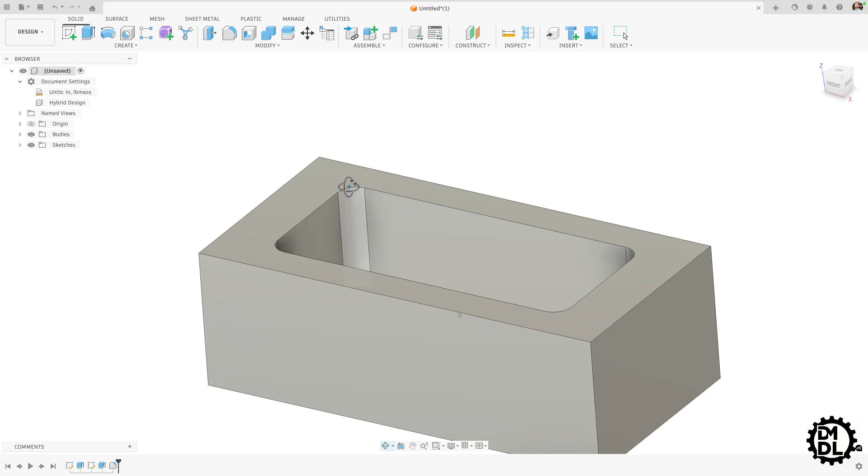Tip number 1 is that you want to slightly oversize the radius of your internal fillets or your internal corners. So the reason for this is your cutter, what you will be using to actually mill this pocket out, has a fixed radius or a fixed diameter.

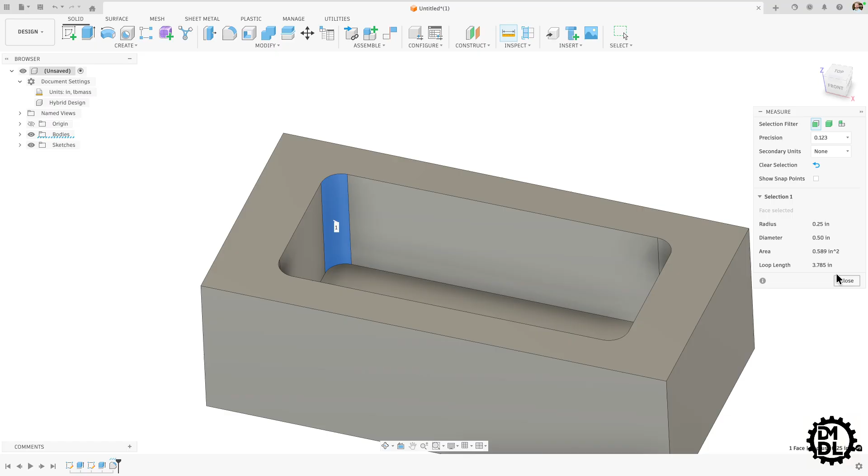And in this case, our pocket is 1.5 inches deep, and I have it modeled with a 0.25 inch radius. That means you could cut this pocket out with a cutter that is 1/2 inch in diameter or a 1/4 inch radius. But if you did that and you look at this from the top, the radius will exactly match your cutter.

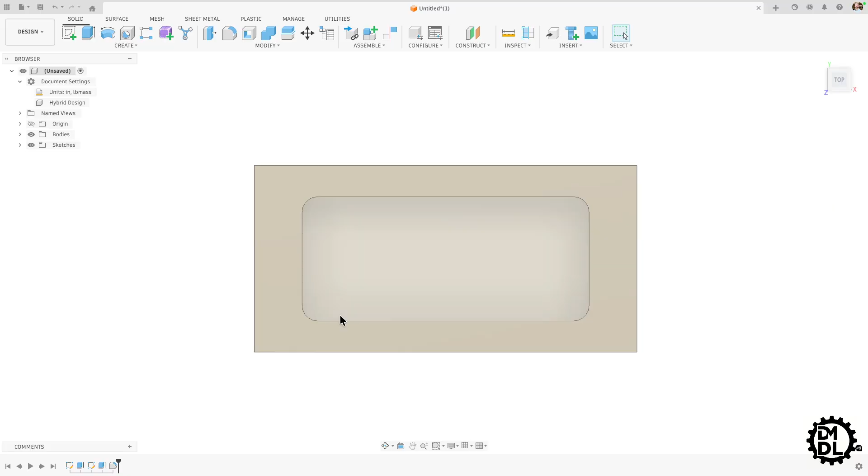So as your cutter comes along, it's going to get to the corner, it's going to have to stop and make a right angle and come down to keep cutting. And it's going to have to do that at each corner. Now, why is that a problem? You might think, well, that's fine. Our fillet is a 1/4 inch. The radius of our tool is a 1/4 inch, no problem. Well, there's a few issues with that.

When your tool comes over and stops and has to change directions at 90 degrees, you're going to engage more material at that moment you come into this corner. It may slightly oversize your fillet or the radius in this corner, so you might be out of tolerance, and your surface finish will not be quite as nice as the tool is engaging with more material at once. So those can cause problems. Those can cause quality issues.

So what you want to do is actually slightly oversize this radius based on what tool size you think will actually be used to cut this out. So let's talk a little bit more about the tool. If we go over to McMaster, here's a tool that could be used to cut this out. You can see it has a 1/2 inch diameter, so a 1/4 inch radius. And this is something that would work pretty well.

It has a cutting depth or a length of cut of 1.5 inches. You can see that here. So this tool is something that could work. But you might notice that it also has a radius on the bottom of it. And that is something that I can show you here in a minute, the impact that will have and why you may want that. Other ones you get can just have a square end, and they'd just be a square end mill. This one has a rounded edge, which is just dependent on what you want your pocket to look like.

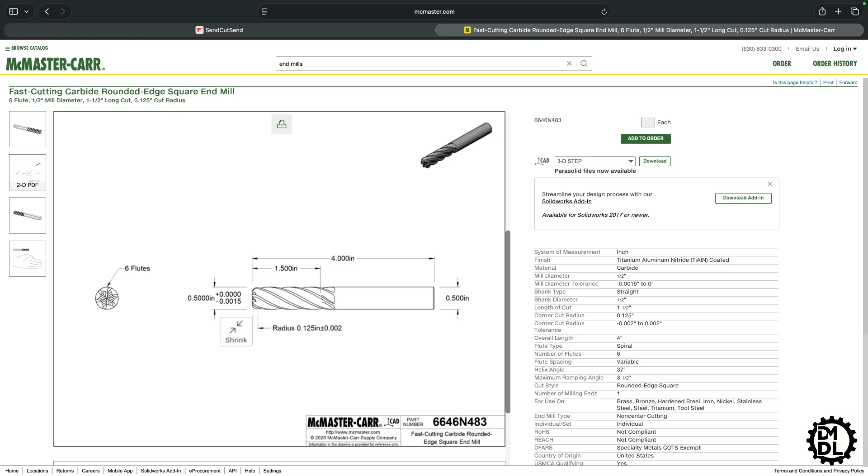But here, you see the diameter is 1/2 inch exactly, plus 0 minus 1.5 thou. So essentially exactly a 1/2 inch. So we want to oversize this a little bit so we don't have this issue of the tool coming and stopping in the corner and then turning 90 degrees. You want it to be a nice, smooth cut. So to do that, let's oversize this.

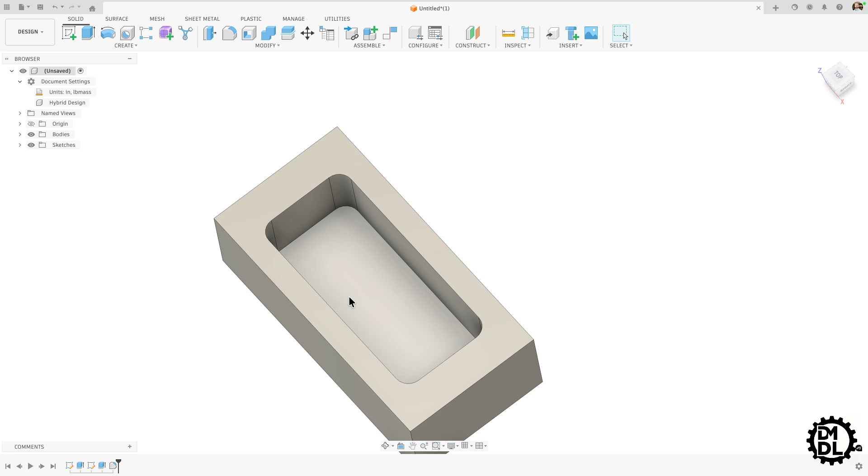So we'll go back into our fillet, and instead of a 1/4 inch, let's bump that up to 0.3 inches. And so now, since it's oversized, the cutter can essentially follow the path of this wall or this edge without having to stop and make a 90-degree turn.

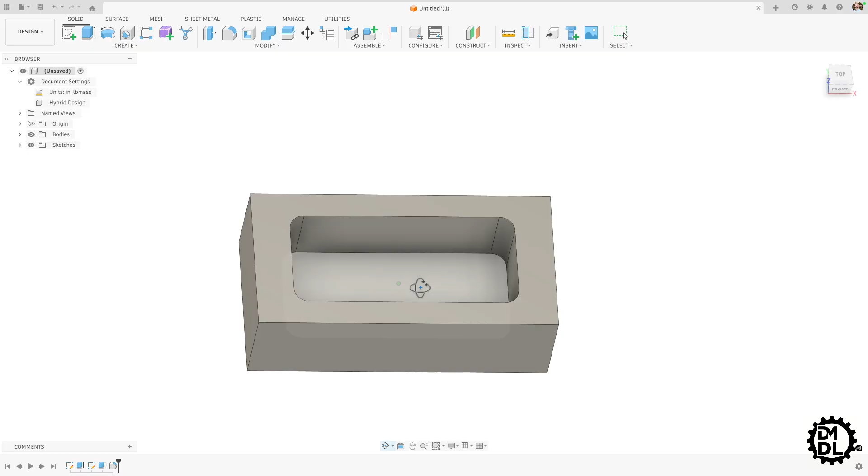One reason why it may make your machinist happier is if you model this at exactly a 1/4 inch, they would probably know this issue and they would automatically default to a smaller cutter so that they didn't exactly match the radius of the fillet with the radius of the cutter.

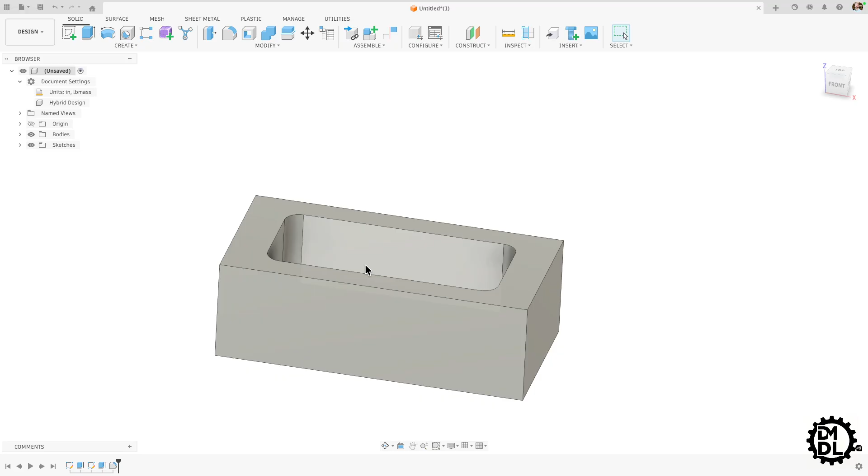And the downside of this is if they use a smaller cutter, it's just going to take longer to actually mill out this pocket, and they will pass that cost on to you, the designer, or the company that is ordering these parts. So that's not ideal, especially if you are trying to maximize or optimize the cost of your part.

So again, just to review that, you want to slightly oversize the radius for your internal corners. And that is oversized based on the radius of the cutter that you believe will be used to actually mill out your part.

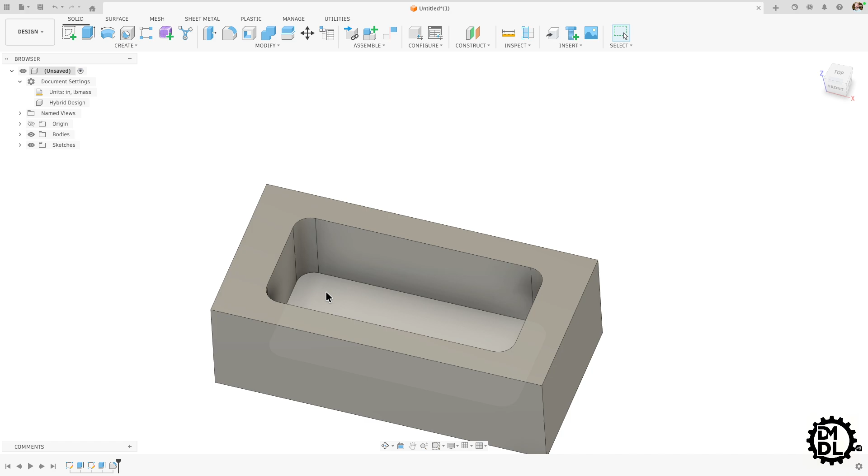Now, the next tip is looking at the ratio between the radius or the diameter of the tool that will be used to mill out this pocket and the depth of your pocket. And now let's try to think about why that matters. So you're looking at this depth here, and then you're also looking at the radius here. So if we reduce this radius, just as an example, let's say we reduce it from 0.3 to 0.13.

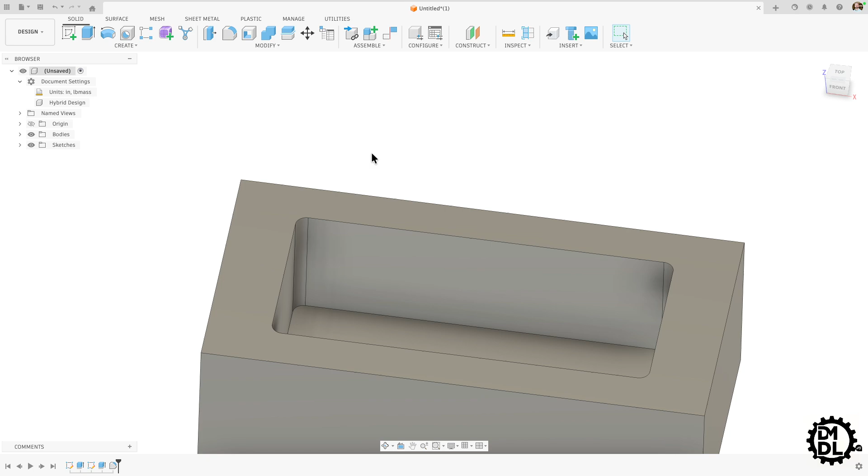Now you're going to have to use a much smaller cutter to mill out this pocket. If it's 0.13, you're going to have to use something that is probably a 1/4 inch end mill because the diameter is 0.25. This radius is 0.13, so a diameter of 0.26 if you double that. And that will require you to have a much longer end mill to make this cut. Now, why does this matter?

Well, again, let's go over to the camera real quick, and I will show you just a quick example of why this may matter. So if you think about it, if you have a larger cutter, you can hold it a little bit closer to where it's actually going to be cutting. Let's say this is your material and this is your end mill. So it's going to come and cut, and you'll have a nice stiff tool, and you're going to get a nice surface finish on the surfaces that you're cutting.

However, if you have a smaller internal radius, then you're going to have a longer tool, and it's going to be held more kind of like this. Just imagine this is a smaller diameter cutter that you'll be using to mill that out. And as you come in to cut your edge, you can see this thing is just not going to be as stiff. So you're going to get some deflection, you're going to get some chatter as it goes along and cuts the edge of that part.

And so you're going to have a worse surface finish, potentially not hit your tolerances, and it's going to be a more difficult part for the machinist to make, and they are going to charge you more for that. So, what is the tip? How should you design this? Well, a good rule of thumb is going for a ratio of 3:1. And this is a ratio of the depth of your cut to the diameter of your cutter, or the cutter that you think will be used to mill out your pocket.

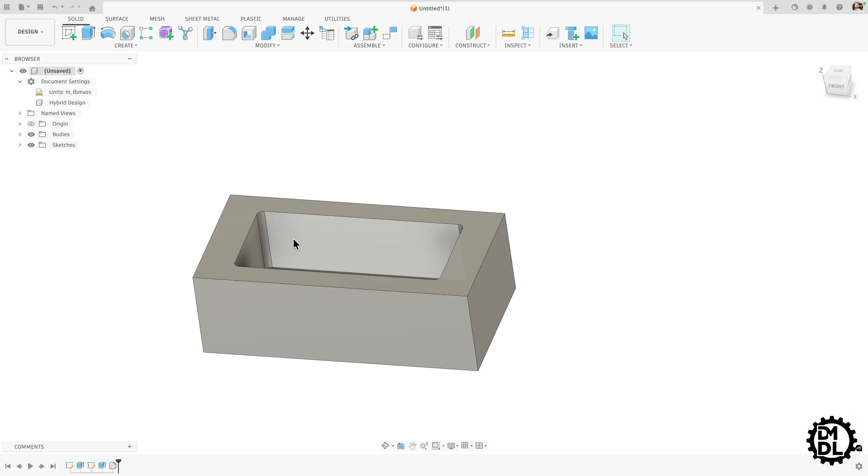So, in this case, let's see, the depth of it here is, well, let's pull up our measurement tool. Okay, depth, as I said, is 1.5 inches. So we want a 3:1 ratio. So 1.5 divided by 3, you probably already did it in your head, that's a 1/2 inch. So that means the diameter of our tool or our cutter should be a 1/2 inch. Okay, so what does that mean for the radius?

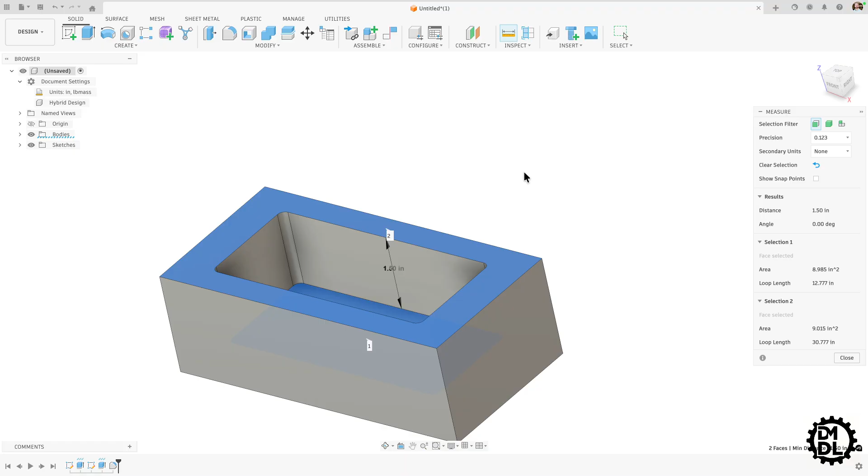Well, that means we should go back to where it was. And let's make sure to close that. Let's go back to 0.25, or as we discussed, something that's slightly oversized. So we'll go to 0.3. This way, you know that you're going to have a nice stiff tool as it's going through and making this cut and milling out this pocket. You're going to have a better chance of hitting your tolerances, and you'll also have a better surface finish on these internal surfaces.

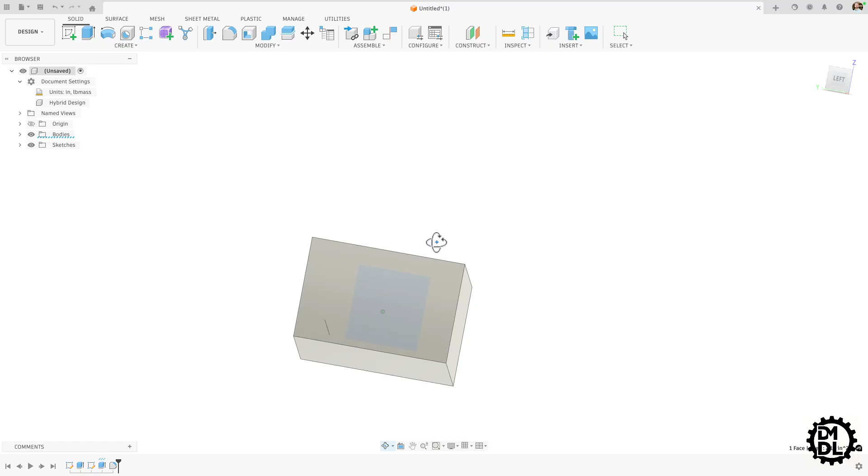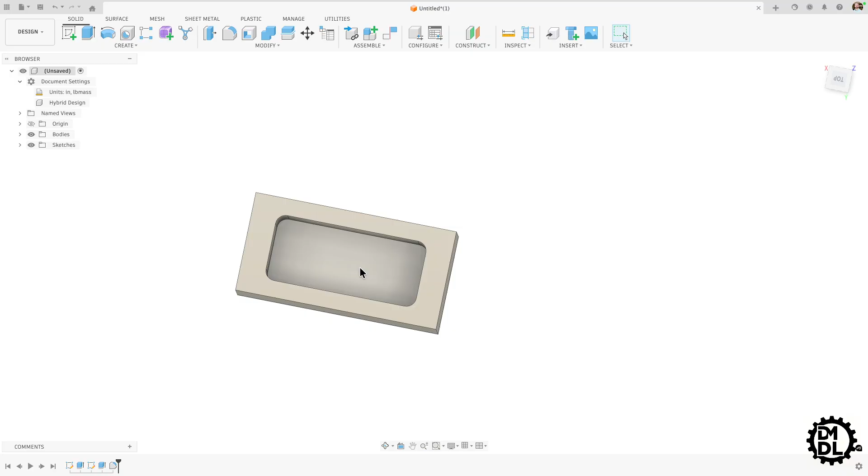Additionally, the cost will be reflected as lower if you do this, and there's a few reasons for that. The first one is, again, if you have a larger cutter, you're just going to be able to cut out this pocket faster. And that's just kind of common sense. If you are using a larger shovel, you can dig a hole a lot faster than if you're digging with a tiny shovel, right? And it's kind of similar here. If you're using a larger tool, you're going to be able to remove more material faster.

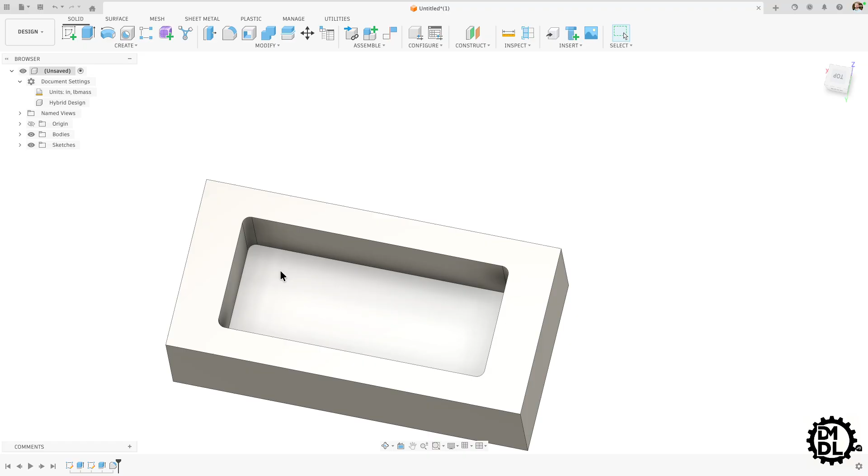But if you reduce your internal fillet here, let's go back to that 0.13. Now you have to use a much smaller tool to mill this out, or you have to use two different tools. You could use a larger one to mill out most of it, and then use a smaller tool to finish it and get these 0.13-inch radius corners or fillets on your internal corners. And so then you have an extra tool change, and that is also going to add some cost to your part.

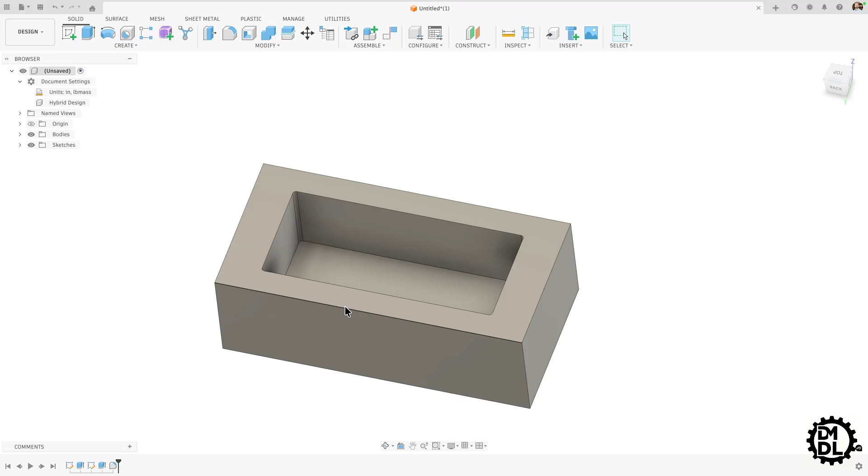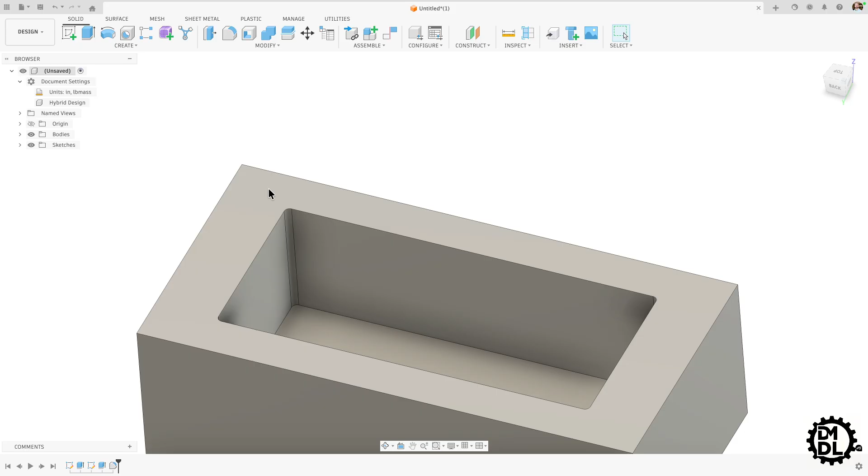And then you can imagine if you make this even smaller, let's say we go 0.063, now this is just a plain difficult part to manufacture, because you're going to have to use a cutter that is very thin, has a very small diameter, and it's going to have to cut a very long distance, 1.5 inches down. So that is going to wobble, that is going to chatter, it's going to mess up your surface finish. And that's if you can even source a tool that has that diameter as well as that length of cut. And again, going back to McMaster-Carr, you can search for that if you want.

If you're designing a part and you want to see, is this even manufacturable? Let's go away from the 1/2 inch milling diameter. And in this case, we were talking about a 1/16 inch. Okay. We don't necessarily need the rounded edge at the bottom of this tool. Let's get rid of that. And we want to look at the length of cut. So here, at least on McMaster, the longest length of cut you can get on something that is a 1/16 inch diameter is only 1 inch.

And let's just look at that. And this is also tapered. So again, this is just a way to see that this is probably going to be a difficult part. Not to say that it's impossible, but you're definitely not making it easy on your machinist, and you are going to see that reflected in the cost. So that's a helpful tool there. It's not one of the 3 primary tips, but make sure that there are available tools to even be able to manufacture the part.

So you want to make sure you stick to that 3-to-1 ratio. And again, that's the ratio between the diameter of the cutting tool to the depth of your pocket. You might be able to get away with a 6-to-1 ratio. You can get away with higher, 9-to-1, 10-to-1, but you will start to see some cost impacts on that.

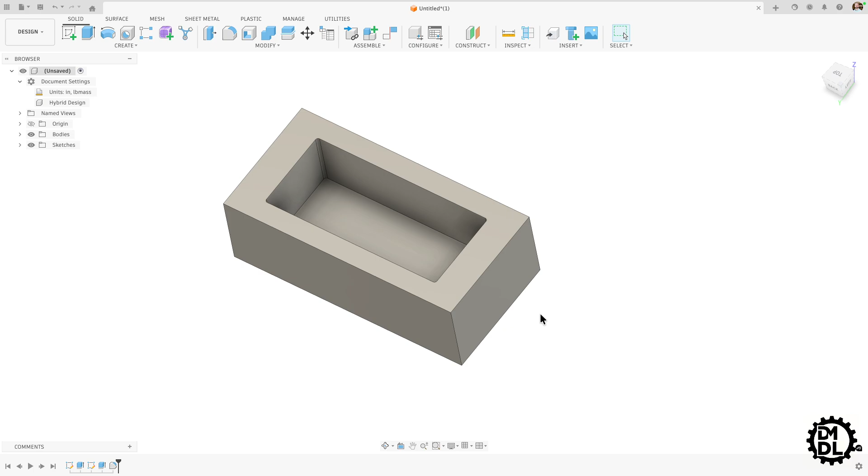And I did a quick little test of this just to see what an online shop would quote. And of course, I went with SendCutSend because they're awesome. And I did a few tests with this. And let's just see what the price difference is. So here's a square piece with a 1.5 inch cut in it as well, with some different radii, with a 3-to-1 ratio, 6-to-1 ratio, and a 10-to-1 ratio.

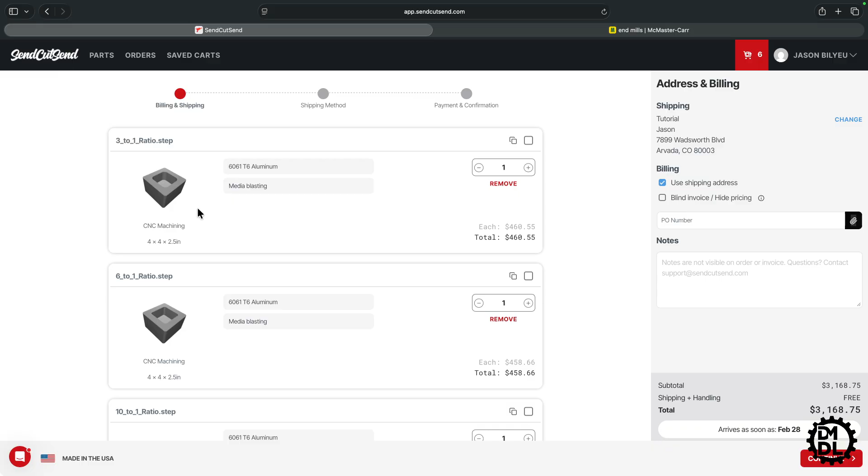You can see in this case, the pricing actually doesn't really change that much. And I think the reason for that is it's a smaller part. The time in the machine to actually mill out this pocket doesn't really change much from using a larger end mill up here to a smaller end mill when you have that 10-to-1 ratio.

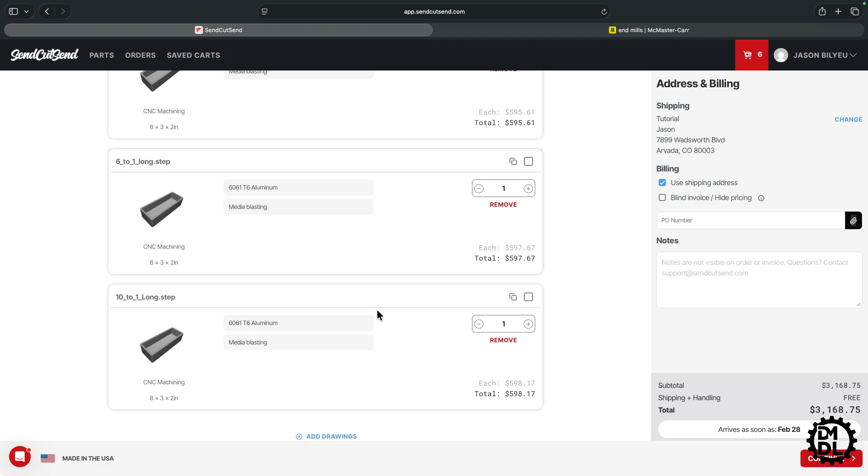However, as you get to larger parts where there's a lot more material to remove, you start to see more of a difference. So if you use the 3-to-1 ratio, you can see this part is $595. If you go to 6-to-1, it goes up to $597. 10-to-1, it goes to $598. Again, in this case, these prices are all very similar, but you can see the trend. As they're having to use a smaller cutter, it's going to take longer to remove all of that material, or they have to do a tool change, which also adds cost.

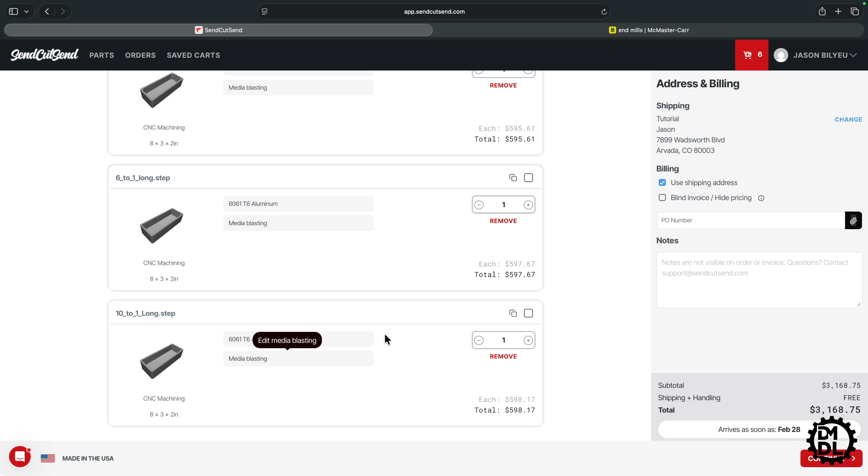So that's just a quick example of why this ratio is pretty important and matters, especially if you are manufacturing a bunch of these parts, and even just a small cost difference starts to add up over time.

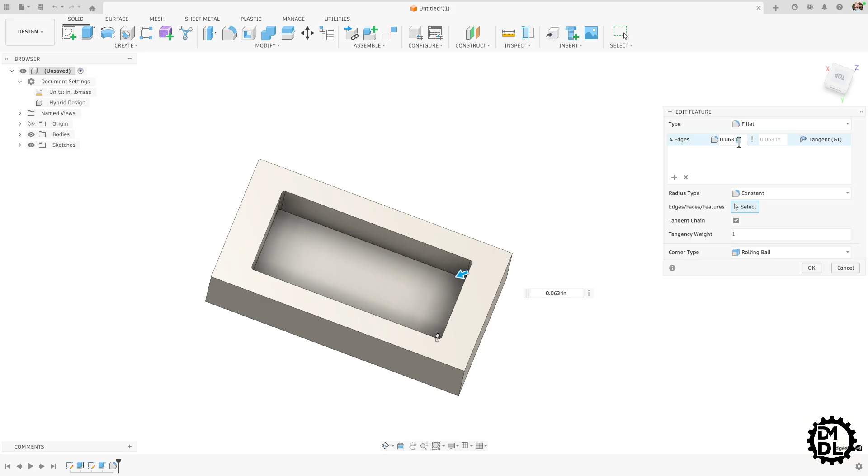So I had mentioned it a minute ago, before we get to our third design tip, that you can get these cutters that have a fillet at the bottom. So let's see what that would look like on one of these parts. I want to change this back to, let's go back to 0.3. We have a decent fillet here, decent radius to work with.

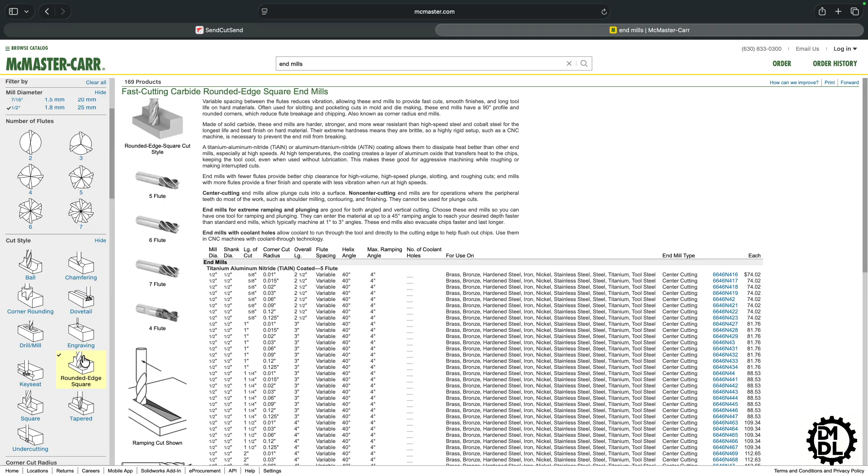And then let's go back over to McMaster, and we'll back up a little bit. Instead of a 7/16 inch, we'll go back to our 1/2 inch. And we want not the ball end mill, but we want to use this rounded edge end mill. So let's scroll through here. Let's find one with a 1.5 inch cut.

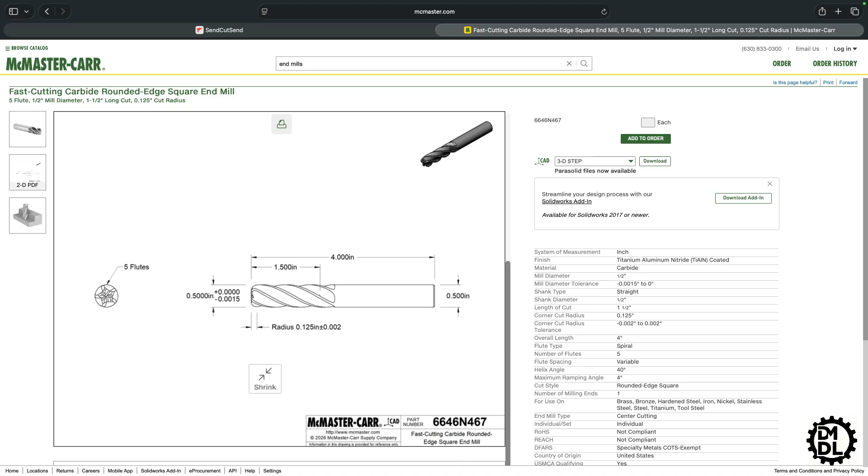Okay. Now if we make this a bit larger, you can see there's a radius at the bottom of your cutter. So instead of having the sharp corner, you can actually have a radius or a fillet at the bottom of your pocket. And depending on your design constraints, what this is being used for, you may want this. So let's just model that in very quickly. We'll click here, 0.125. And there, you can see we have added that fillet at the bottom of the pocket.

So again, go to McMaster, look at the different tools. There's other websites too that you can reference if you need more exotic tools, but McMaster is usually a really good place to start.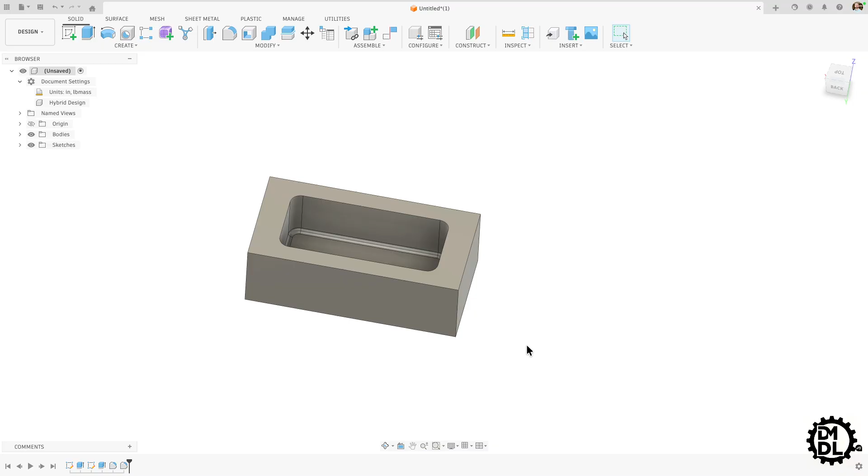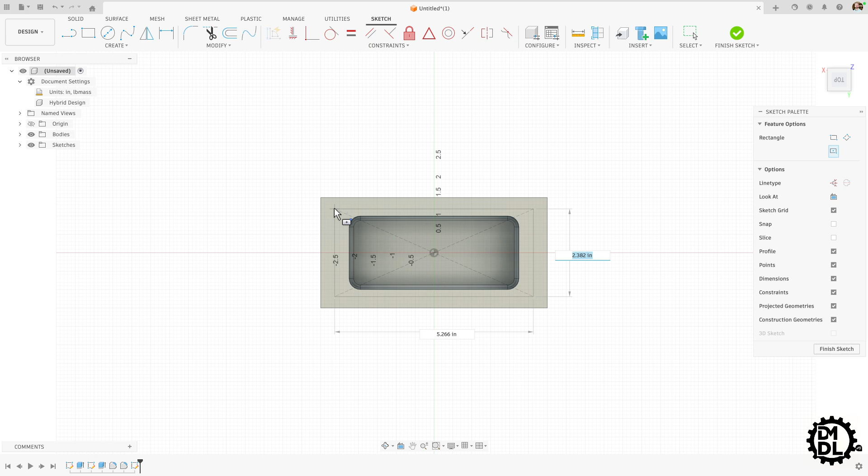Okay, the third and final design tip that will make you a CNC mill design pro. I don't think that is probably the right wording for that, but will make you more of a pro when you're designing parts that will be manufactured with CNC milling. And this has to do with tapped holes. So let's add a few tapped holes on this part. Okay, we'll create a sketch on this top plane. Rectangle, we'll start in the center here. Bring it out. And the distance from the edge.

Let's see. Oh, and I got a low battery signal on my laptop. So let me plug that in real quick. All right, crisis averted. Let's keep going with this tutorial.

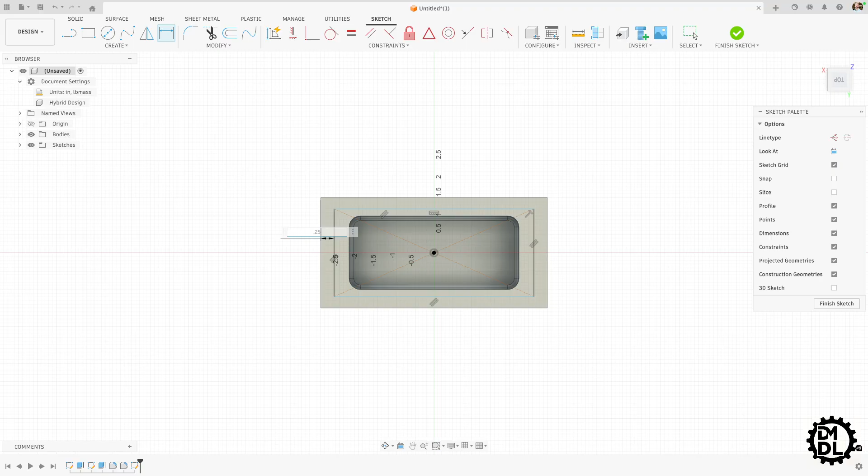Let's make this 0.25 from the edge. We'll make this one 0.25 from the edge, okay. And that'll be our sketch. This will tell us where we want to put our tapped holes. And we'll come up here to the hole tool. Okay, select multiple. Wow, look at the default there, those are giant. Not what we want, but let's adjust those. So the extent, well, first let's give you the tip.

So the tip here is you don't want to, by default, add a threaded hole that just goes all the way through your part and is threaded all the way through, especially if you have a thicker part, like the one we have right here, which is 2 inches thick. The reason for that is having to tap this all the way through, there's a lot of threads that you will need to add, and it's going to build up a lot of friction. And depending on the material that you're working with, you may actually break your tap, and that will cause lots of headaches for your machinist and headaches and money for you.

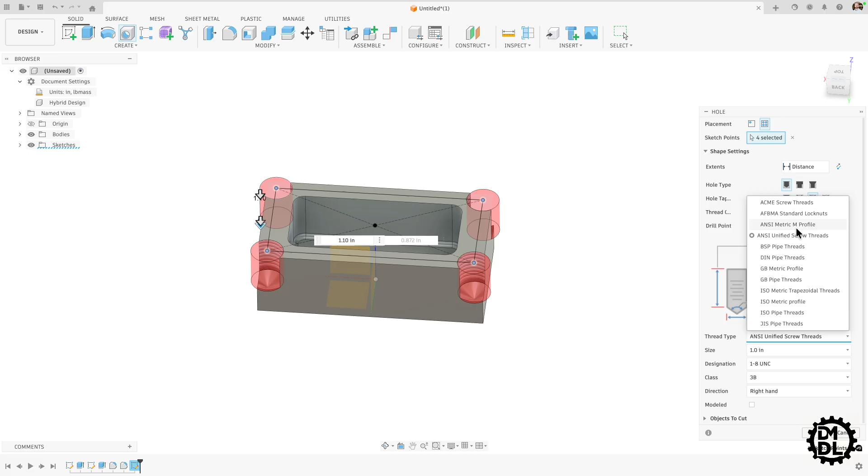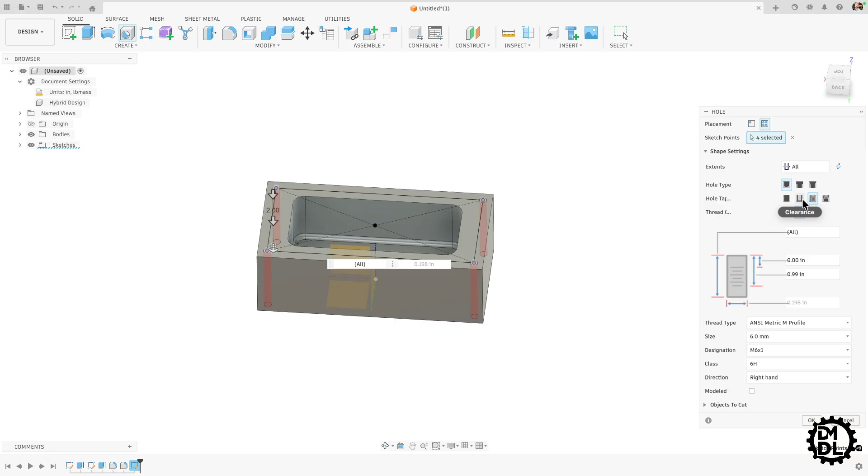So let's actually select a tapped hole that fits in these locations. So let's see, let's come down here. We want metric, okay. Let's see, what size do we want? Let's make it 4 millimeters. We have an M4. Actually, let's bump that up just a touch more. Let's go to 6. Okay, and you might be tempted at the start, like I mentioned, to just say, well, I just want a tapped hole. It's going to go all the way through. Yep, we'll set it to tapped here, and we just want it to be full.

Hit OK. And wow, look at that. We have this tapped hole that goes all the way through our part. You can thread it from either side. It's very usable, right? Well, no, not necessarily. This could be a huge problem to manufacture.

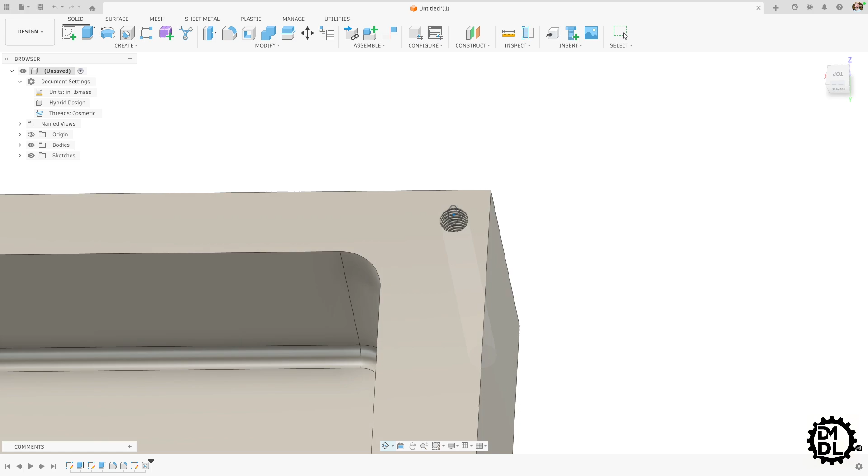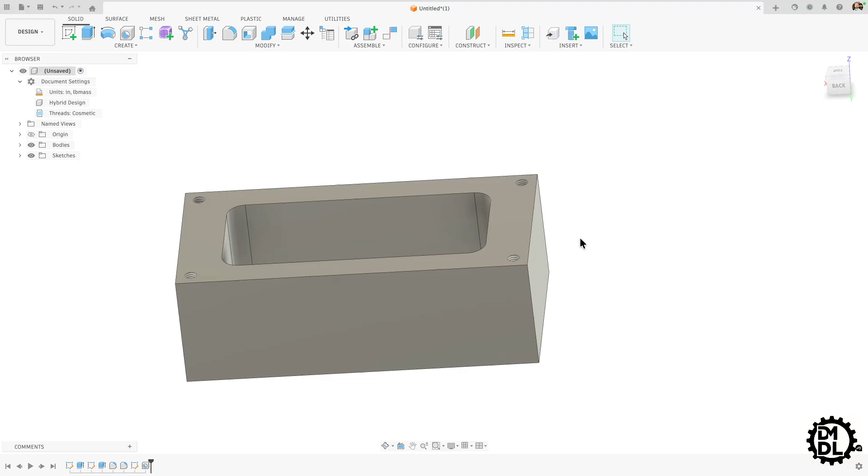Having to tap this all the way through, especially if you're working with a common material like a 300 series stainless steel, maybe if you're working with titanium or just a hardened steel in general, trying to tap a hole like this is going to be an absolute nightmare. And you'll probably just get either a no quote or they'll push back on you and say, hey, we can't tap this all the way through, unless they're able to use something like a thread mill to cut the threads.

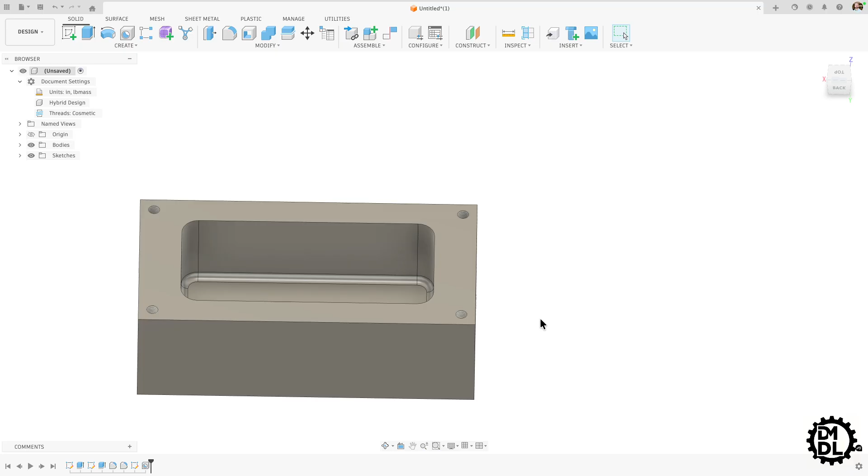But even that is going to be difficult on a part this thick with this small of a tapped hole. So what's the solution? Well, in general, you don't need a tapped hole to be tapped all the way through. To get the full strength of that tapped hole when you're threading a screw in, you probably only need 1 to 1.5 times the diameter of that screw in length. So for example, this is for an M6. You will only need 6 millimeters of threads, or maybe up to 9, maybe 12, maybe 2 times the diameter

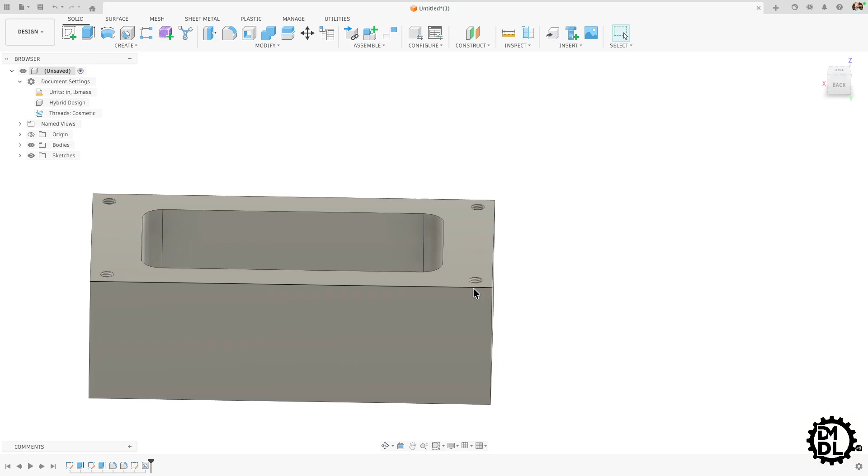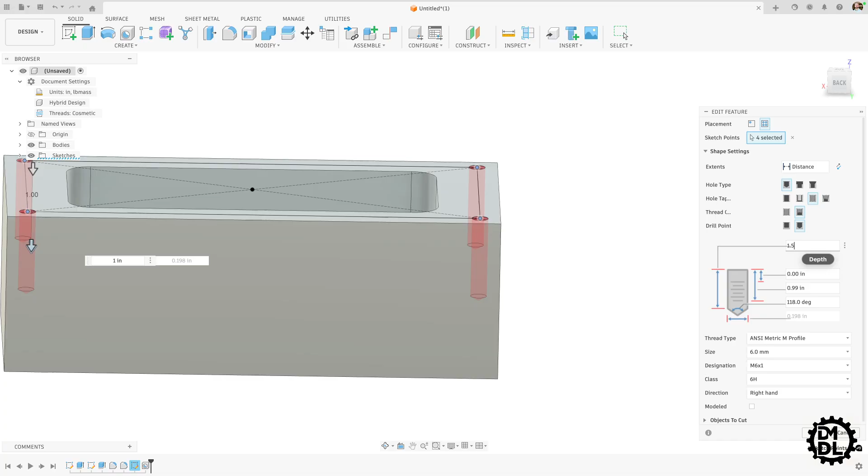of the thread itself. So let's go back into our hole tool and update this. So we'll come up here, instead of going all the way through, we'll make it a distance, okay? And for the thread offset, we're not gonna have it full, but we will have an actual offset. And then the depth of the drill, let's just change that to 1.5. Oh, and I hit enter and closed it. So let's open that up one more time. Okay, so we're drilling 1.5 inches deep there.

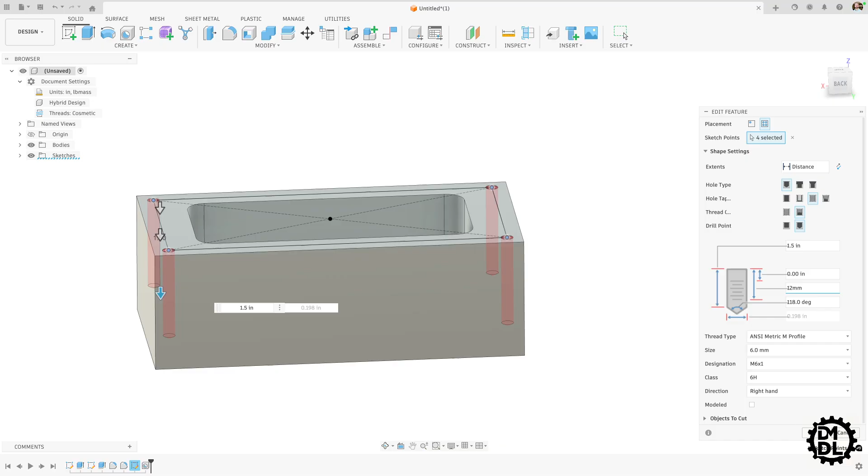But we only need, like I said, about 12 millimeters maximum of threads. So here you can come in, and this is your thread depth. So they'll drill it out, and then they'll come in and actually tap it. And that's where they add the threads to your part. So let's test this out. Let's see, can I mix up units here? 12 millimeters. And it looks like I can. Okay. And so now let's take a look at this. Let's do some inspection. We'll do a section analysis, so we can actually look at a section of this thread.

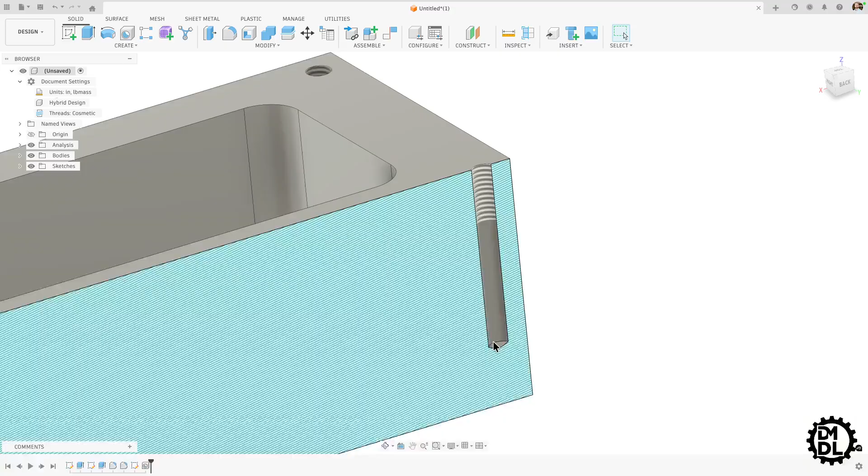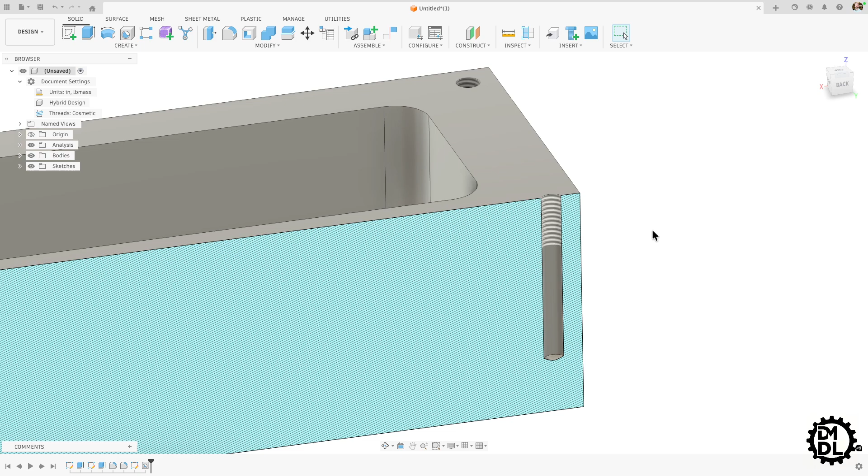Okay. And as you can see, we probably drilled this too deep as well. Honestly, you don't need it a whole lot deeper, probably 2 to 3 thread pitches deeper than where your threads end. But you can see it's only threaded down 12 millimeters. This is going to be so much easier for a machinist to actually make for you. This is going to be so much easier to manufacture. The odds of breaking a tap in this are much, much lower. And so this will make your machinist happy, and happy machinists make good parts. In general, that is mostly true.

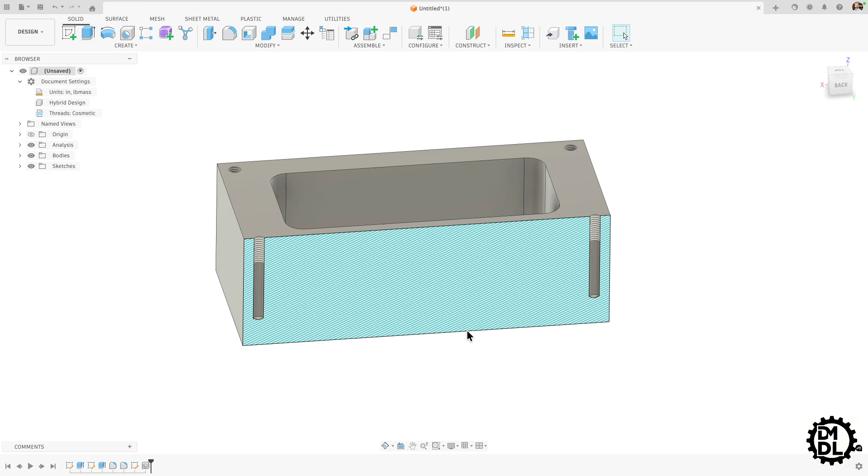And what I mean by that is if you design your parts well and make parts that the machinist doesn't necessarily have to worry about, try anything crazy, if they're not breaking taps, if they're not having a hard time hitting your tolerances, they're going to be much happier, and you are going to get better parts. So that is it. Let's turn off this analysis. So this is the part.

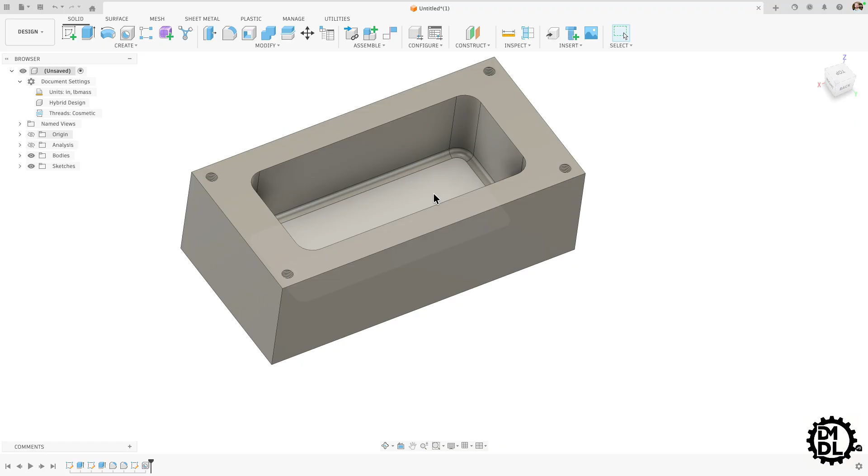We have this milled pocket, and I went through and told you about the importance of oversizing just slightly your internal corners, your internal fillets. Make sure you oversize them just slightly over the radius of the tool or the cutter that will be milling out these pockets. That will allow you to have better tolerances and better surface finishes. Also, make sure that the ratio between the diameter of your cutter and the depth of your cut is around 3 to 1. Maybe bump it up to 6 to 1 depending on your design. But that 3 to 1 ratio is going to be kind of your Goldilocks zone. That's where you're going to want to be.

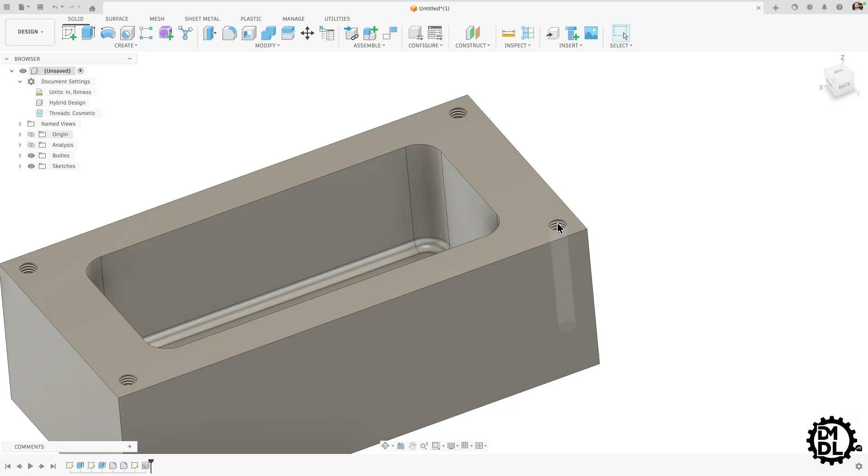And then finally, for tapped holes, especially when you're adding tapped holes in something like stainless steel or titanium, make sure that the depth of the thread portion itself is somewhere between 1.5 to 2 times the diameter of the thread. So again, in this case, it's a 6 millimeter or an M6 thread. So 6 millimeters, multiply that by 2. And so you can have a threaded depth of 12 millimeters, and you will have a good part.

Okay, so those are a lot of tips, well, 3 tips, a lot of details. And those are going to improve your parts. They are going to make them more manufacturable. If you are someone who is just getting started with Fusion, maybe just getting started in mechanical engineering, these are tips that you need to memorize and just inherently have in everything you design.